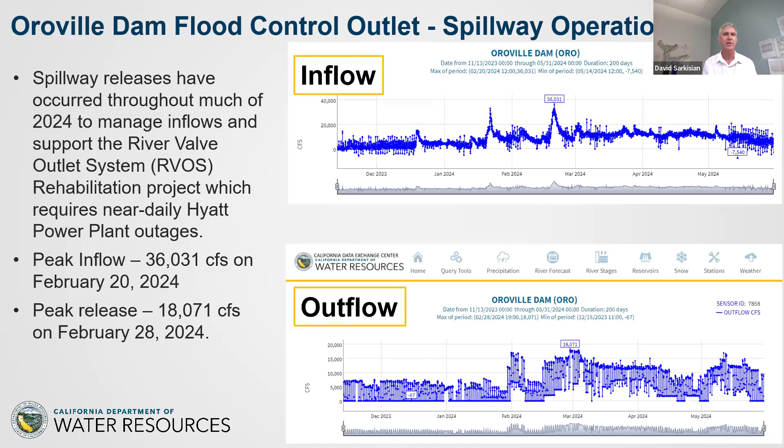Peak inflow was only around 36,000 CFS. That was back in February. So slow and steady is nice, of course. And our peak release was around 18,000 CFS back in February. So in terms of spillway use, quite a bit, but not really large magnitude. Let's go ahead and advance.

This slide speaks to our piezometers that were installed in our flood control outlet, the gated monoliths that house the gates. In that bottom profile is a cross section through those monoliths, and that green line is basically how we drilled through those piers or walls and placed piezometers at the foundation of the structure. We've been watching this data - I think I shared some in the past. What we're looking for is any high piezometric pressures or groundwater on the bottom of the structure. Thus far, we have not seen that, so that is good news, whether it's with the lake topping out or as we're making spillway releases.

The graphic or chart on the bottom right is quite busy, so I'll just try and walk through it quickly. The reservoir elevation is in that light blue, so you can see it ramp down and up through the year, ramping up in the springtime typically. The green bars on the bottom is precipitation, a biweekly value of how many inches of rain. In red is actual spillway releases - we want to see, do things react during a spillway release? And lastly, the little dots are the actual data from the piezometers. The majority of them are pretty quiet, that band in the middle with the amber and some blue and some red underneath. The one piezometer we do see a little bit more reaction from is B162 in gray, in the top of the figure there.

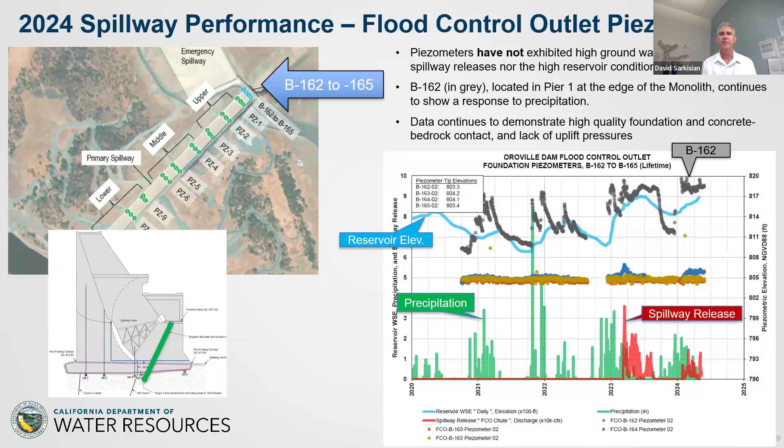That piezometer is on the far edge of one of the monoliths, where we transition from the gated spillways to another monolith, so it's a little bit different configuration. We're seeing that react to both rain, and it also stays a little bit elevated when the lake is up higher, but the pressures are really not of concern. It just tells us there is some communication - rainwater is getting to that piezometer, and when the lake is high, it's also seeing a little bit of seepage there, but nothing to the level of concern.

Here's a graphic depicting the piezometers down at the toe of the dam. You might recall we installed these, I think it was in 2020. We put a series of piezometers in the toe of the dam to monitor pore pressures at that location within what we call our drainage blanket. We've been seeing similar trending behavior with these piezometers. In the graphic, we've got the reservoir elevation, precipitation in green, and you can see how these kind of ramp up and ramp down.

Of course they become elevated when we have a lot of rain, so a lot of that rain is percolating down through the embankment and getting into our drainage blanket. Then as the rain diminishes, but the lake is still rising, topping out in late spring, we're actually seeing these piezometers fall off - the pressures are dropping, groundwater's dropping. That tells us this is largely driven by precipitation. We've seen that trend in 2023, 2024, and even back in 2022, though that was a little bit more subdued. But all this aligns with our thinking over the years at how precipitation really drives the amount of seepage we see, and it correlates with what we see through the seepage collection weir for the dam. So that's all good news, confirming our understanding of what's driving seepage for the dam.

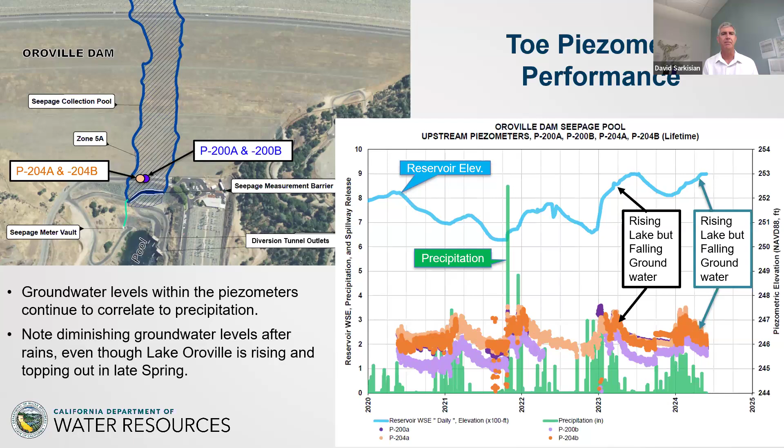Moving on to the flood control outlet projects - you might recall we've been working on analyses for monoliths 25 and 26, the gated monoliths, for a number of years. Since we last talked about this topic, we've updated our model to address some comments from the Division of Safety of Dams. We've also incorporated the pore pressure data from those piezometers to reflect what we're experiencing rather than overly conservative assumptions. What we've seen in our reanalyses is slightly better performance under seismic loading, so a potential for less retrofits. We're packaging up that analysis and anticipating a submittal to both FERC and DSOD, hopefully in the coming weeks.

Another document we'll be updating is our retrofit design criteria document, which lays down the criteria we anticipate using when we get to the point of designing retrofits. Getting concurrence from our regulators early on that criteria is really helpful to move things along. We also reanalyzed the bridge, and that fortunately meets a performance standard for no collapse for a 10,000-year seismic event. This work is ongoing - these models are very robust, and we get a lot of great feedback from our regulators to fine tune things and revisit the modeling and the performance.

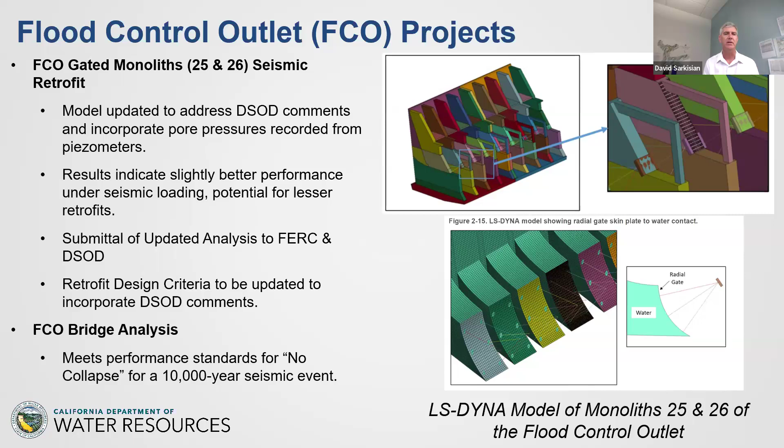This slide is intended to chart the road map of how we see this unfolding. The past couple of years, we were working on nonlinear analyses, sophisticated modeling, and submitted results to DSOD and FERC. In this time frame, we're incorporating that piezometer data into the modeling. We're also planning to take a quantitative risk analysis look at these monoliths so we can focus on the potential failure modes specific to these monoliths and understand the baseline risk at a greater detail than what was done back in 2020 with the level 2 risk analysis. That's really going to help us build the case and understand what investment we need to make and how we're going to efficiently and effectively reduce risk for the structure.

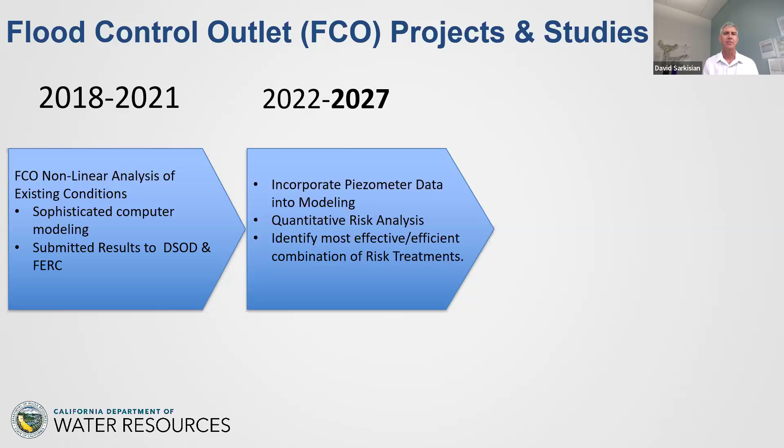We'll also look at the variations of risk treatments in this time frame. Let's advance again. Like we've had in the past, we see these two possible outcomes, now that we've got this work completed and the information in hand to make a really well-informed decision. Path 1: if it's feasible to retrofit and the risk reduction achieved looks appropriate, then we'd initiate a design and permitting effort to get that done.

Or if the retrofits don't look feasible—because the piers have anchors in them for the radial gates, it's a very complex structure, and we have to be mindful of how invasive we are with retrofits—if it just doesn't look feasible or the risk reduction is insufficient, that's when we start looking at some of those big items that came out of the comprehensive needs assessment, like a new FCO headworks structure or other new piece of infrastructure.

I still think we're on that upper path where we'll find some good solutions to retrofit the existing structure, but we just wanted to outline the time frame where we see this heading.

In the meanwhile, we do have other projects, one of which is the radial gate hoist maintenance project that we were working on. There are a number of other efforts on the FCO. In the case of that project, this year we aren't necessarily getting a new hoist replaced out there due to the hydrology and the need to operate the spillway to support the RVOS rehabilitation project. So that activity isn't necessarily happening this year, but it's still a project that's ongoing, and of course a multi-year project considering the structure needs to remain in service.

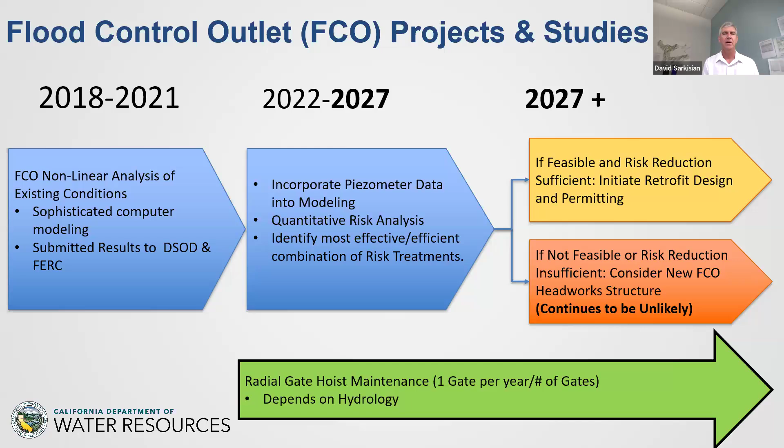Moving on to the emergency spillway erodibility study. We had a number of tasks for this project, one of which was to update the geologic model—that's completed. We also completed the hydraulic modeling of splitting flows between the flood control outlet, meaning the gated spillway, and the emergency spillway, to make sure each facility is really independent of the other in terms of passing flow, since they're right next to each other. That was a question we needed to answer, and we've confirmed that they're independent of one another.

We also verified the emergency spillway capacity, and now we're really moving into the heart of the erodibility study, having these preliminary tasks accomplished. Right now we're analyzing the 2017 incident, using the erodibility or erosion experienced there to establish erodibility parameters for the different types of rock underneath the emergency spillway. That's kind of unique—most owners, fortunately, don't have events where they've got this kind of information. In our case, we do, so we're going to leverage it to really calibrate how we model the rock materials for this study.

We've also got a 3D hydraulic modeling effort ongoing to support the study, and the development of the actual scour model is ongoing. We see this work completing in 2025—I suspect maybe this time next year I'll have some information to share.

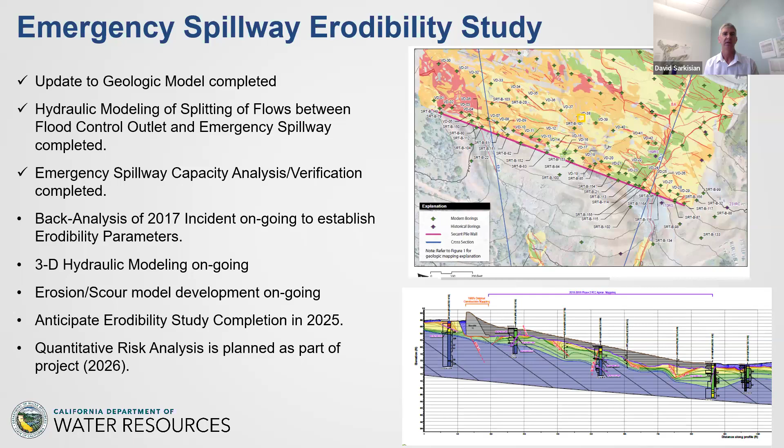As part of this study, we're looking at 5 scenarios, meaning hydraulic flows over the spillway, and we're going to use outflow hydrographs rather than just a constant flow. Most of these types of studies use just a constant flow because it's a lot easier modeling-wise, but that's a little conservative, because these storms don't last forever—they have a rising limb, a peak, and a falling limb. So that's what we're going to do here.

We've got a number of scenarios tied to return periods, so that we can take this information into that risk workshop and understand the frequency of these types of events and the damage to the spillway or hillside that might be experienced under these flows.

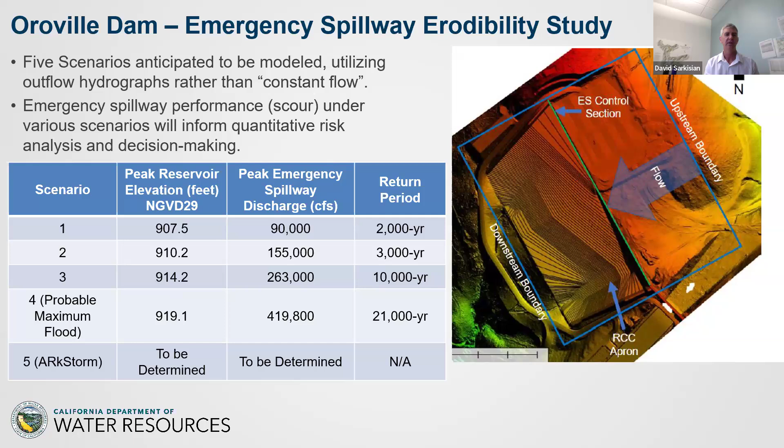We'll take it up to the probable maximum flood. And then we're also going to take a look at the ARkStorm, one of the ARkStorm scenarios. You might recall that's a much longer storm but has a lower peak. But that may lead to a different performance for the emergency spillway. So we want to look into that and make sure we've captured that kind of storm and have an understanding of its performance under that longer but less intense flow.

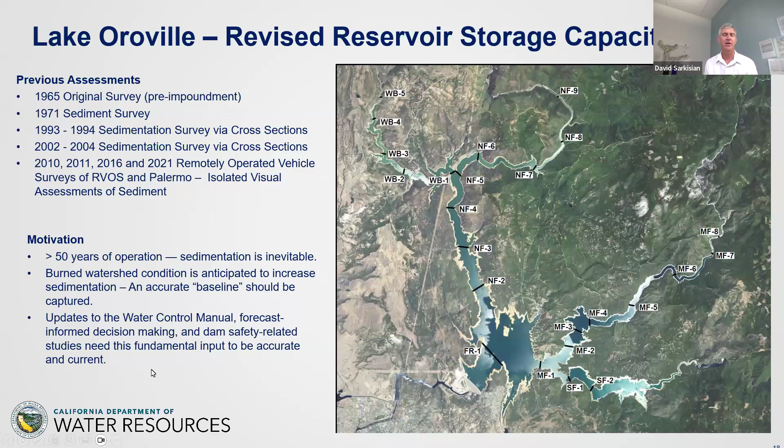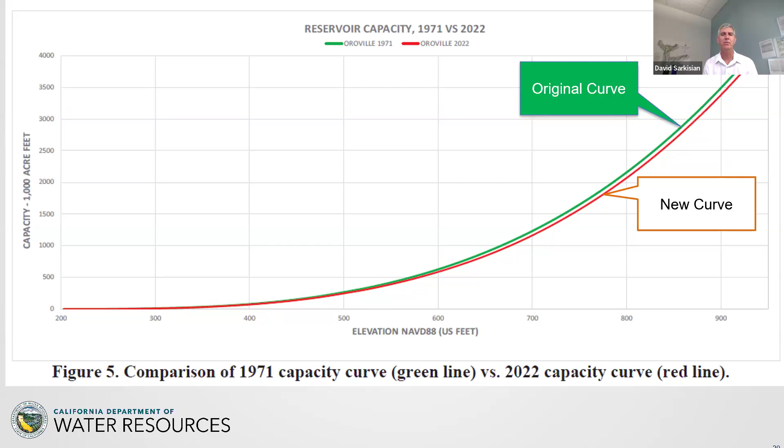Here are the two curves, original in green and the new curve in red. Just visually, not a huge difference. I think that was somewhat expected. We don't see huge amounts of sediment coming into the lake, so we felt this makes sense based on anecdotal observations and where we think we might land. Let's go ahead and advance to the next slide.

Of course, there is some loss of storage. Some of that is sedimentation. And looking at the data, most of that is in the far fingers of the lake, below elevation 650, where it makes sense the rivers are bringing this material in and it's dropping out relatively quickly in most cases.

But we also think some of the difference is just due to the coarseness of that original survey. It was basically 20-foot contours, so pretty coarse in terms of precision and accuracy, done with 1960s methodologies, compared to modern technologies. The LiDAR provides a bare earth surface, and our data is in 1-foot contours. So we think there's, in some cases, just a mismatch in technologies.

So that's basically, we've had this 3.5 million number for years and years, and now our current capacity at elevation 900, so the lake topped out, is at that 3.4 million acre feet value. That's a reduction of roughly 112,000 acre feet, 3.2% over greater than 50 years. I think it kind of fits at least within where I think this would end up. Again, just great information to have as we move into these other studies, that we now have this current understanding of what we've really got behind the dam.

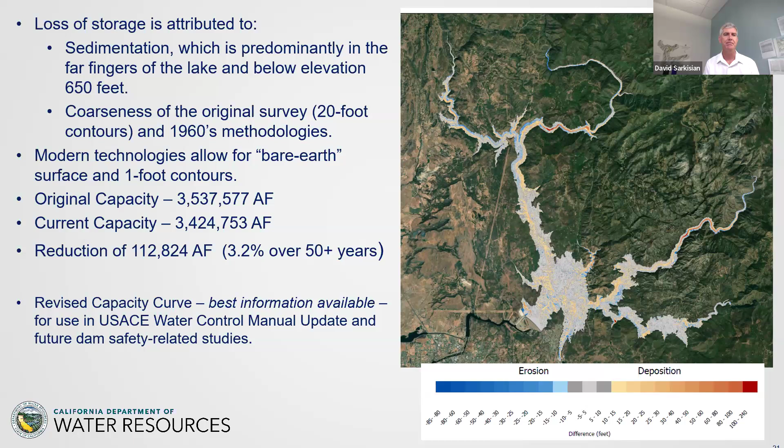As many of you know, we have a 5-year Director's Safety Review Board, or a Part 12D safety inspection. The first is driven by the California Water Code, and we conduct that board with a Division of Safety of Dams. The Part 12D safety inspection is conducted with the Federal Energy Regulatory Commission. In both cases, the consultants we contract with need to be reviewed and approved by FERC and DSOD.

We retain them through a request for qualifications, where we interviewed a number of people to make sure we're getting a diverse and independent perspective as they conduct these reviews. Back in December of '23, we conducted the Director's Safety Review Board inspection with DSOD of Oroville and the Saddle Dams. Then in January, we conducted the Part 12D, what was called the periodic inspection with FERC. FERC updated their guidelines, and the periodic inspection does not have the level 2 risk analysis compared to the comprehensive assessment, Part 12D.

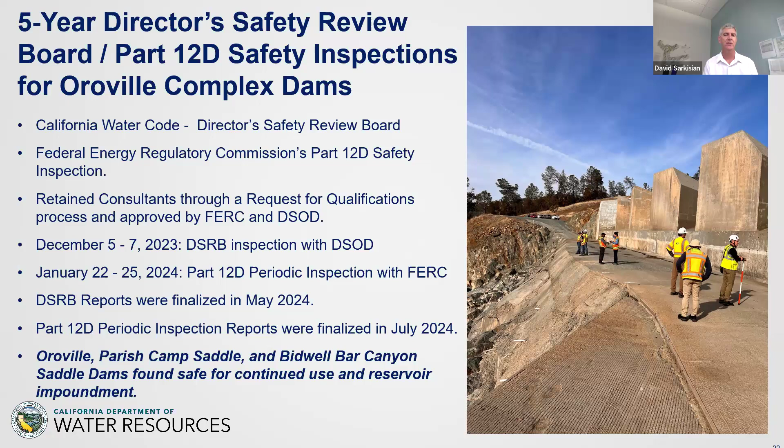We received our Director's Safety Review Board reports in May and the Part 12 reports in July. In both sets of reports, one of the main conclusions we're looking for is that Oroville, Parish Camp, and Bidwell Bar Canyon Saddle Dams were found safe for continued use and reservoir impoundment. Next slide.

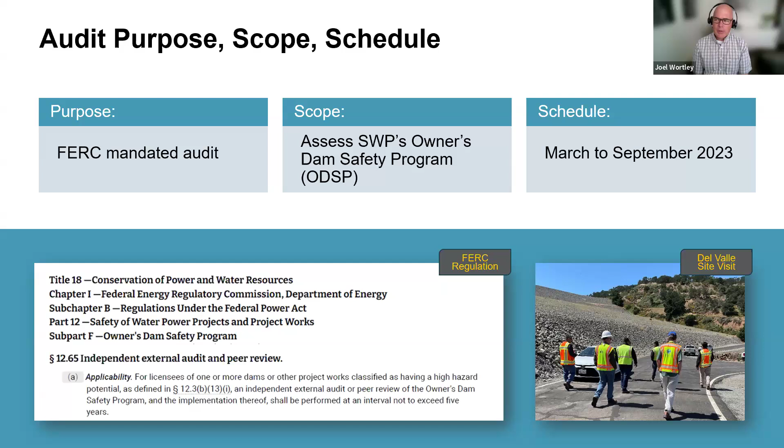Communication works well within the program between the Chief Dam Safety Engineer, its steering committee, and the executive. The Dam Safety Engineer himself is a strong champion and strong leader for the program.

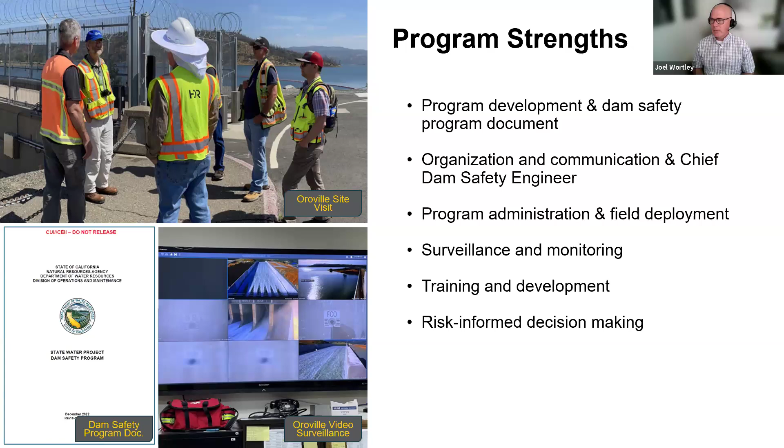The opportunity we found is that there's a lot of development happening at the State Water Project right now, and the policy needs to be kept up. So there's an opportunity there, when needed, to make sure that policy gets updated.

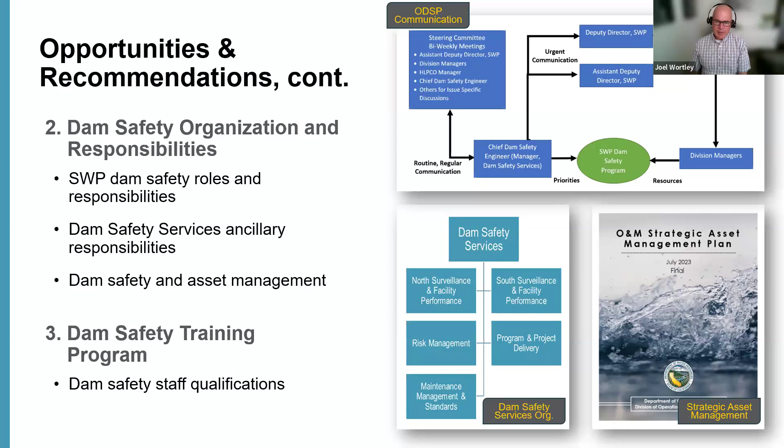When it comes to communications, coordination, and reporting with respect to program metrics, we found that the reporting was on point with what was being accomplished, but there was an opportunity to put it in context of requirements. So not just reporting how many of whatever got accomplished in a given year, but how many needed to be accomplished, to demonstrate minimums were being met or exceeded. Doing so would facilitate a scorecard view of the program's performance, which enhances reporting.

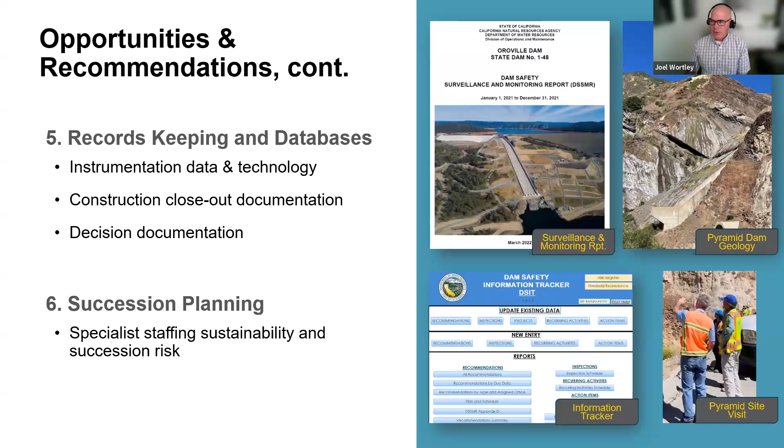With respect to continuous improvement, we say that the program does very well in challenging itself and driving improvement. We did identify a few other opportunities.

With respect to a portfolio view of dam safety risk, good progress is being made around risk-informed decision-making and evaluating potential failure modes. The opportunity here would be to roll those up into a portfolio view, which aggregates those individual risks, gives more context to them, and promotes or facilitates risk communication internally and externally.

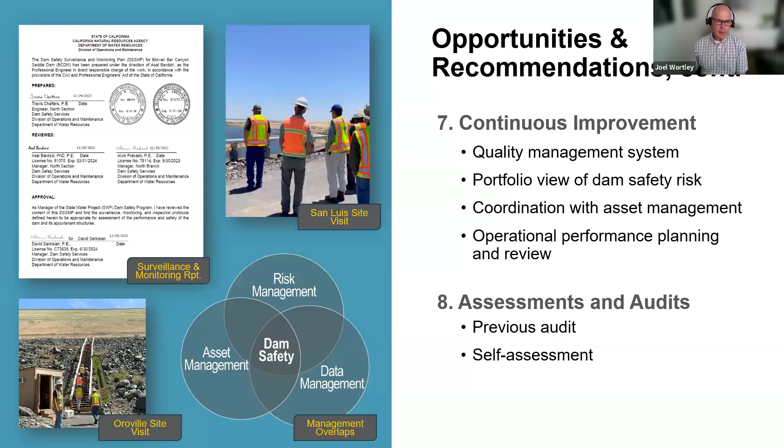So, audit conclusions. The program has come a long way and is doing well. There are ongoing challenges, and the first we'll highlight here is just organizational change.

Aging infrastructure is driving a lot of change and a push towards asset management within the organization. As commented, that overlaps with risk management and data management and several of the underlying processes that build up to become the dam safety program and effective dam safety. It's going to be an ongoing challenge for the program to make sure they are not only keeping up with those changes, but leveraging them to the betterment of the program. They need to be at the table and have a strong voice in ensuring that dam safety is kept informed and kept involved.

Staffing and succession, as we've already talked about, these are key to the dam safety program, and definitely some of the bigger challenges we've identified in the audit. Technology helps, but at the end of the day, dam safety is reliant on people and judgment. And with turnover and loss of staff, that loss of institutional knowledge can make it hard to maintain that critical mass of experience and judgment.

And I'm sure we all know hiring these days is very challenging. So those skills and experience are hard to come by. They're in short supply. You can't just hire people who will line up and look for an opportunity with you. And even the ones you do hire, it takes time for them to get to know the facilities and to build the experience and familiarity to have good judgment when it comes to complex issues.

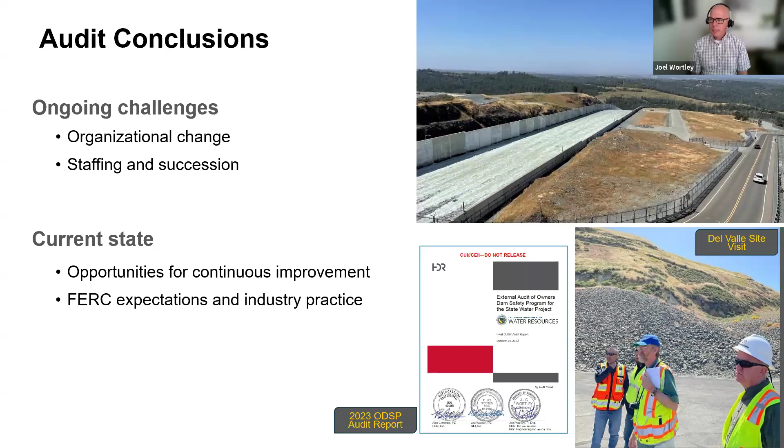We did find that the program meets FERC expectations, with the one exception - non-conformance regarding the annual dam safety communication to staff - and that it does compare favorably to industry practice and other dam safety programs we've been exposed to. And with that, I'll thank you and ask if there are any questions.

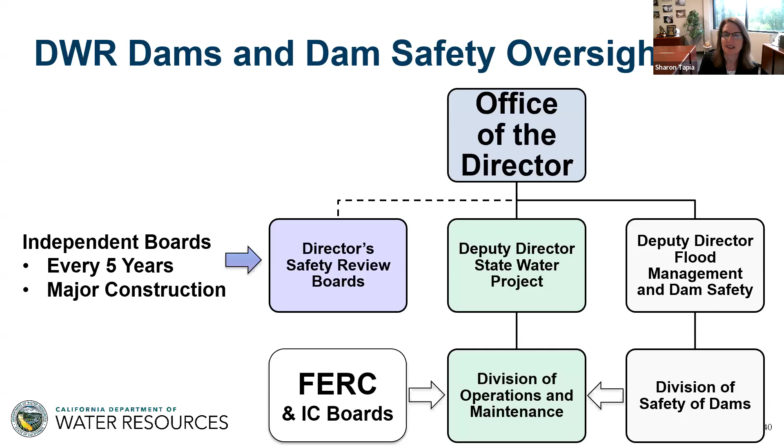In the earlier presentation, the independent boards were already discussed, so I'll skip that on this slide. I did want to note, though, hydropower dams owned by the department are dually regulated, as you're probably aware, in that they are regulated by both DSOD and the Federal Energy Regulatory Commission, known as FERC.

In response to a catastrophic failure of the St. Francis Dam that occurred on March 12, 1928, the California Dam Safety Program was created in August of 1929 to regulate dams with respect to dam safety. So this month, our program turns 95 years old.

This is a view of what our program looks like. We have one of the largest dam safety programs in the nation with a current staff of 93 full-time employees. Our budget last year was almost $28 million, and this budget primarily funds our positions.

We do not fund projects for dam owners, nor do we make decisions on the need for the construction of new dams or dams to be removed. Owners are given the option to either repair their dams to meet current standards, alter their dams to lessen jurisdictional size, or to remove their dams from jurisdiction.

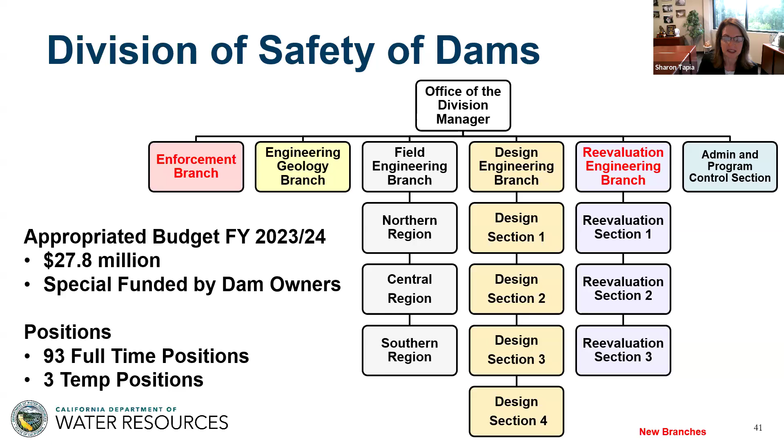Our program is led by a team of expert engineers and engineering geologists. We have 2 new branches noted in red that have been added in recent years, an enforcement branch and a reevaluation engineering branch, and I'll go into that a little later in the presentation.

We are currently regulating 1,234 dams, and we have a varying inventory of dams with 200 dams that are over 100 feet high. And obviously Oroville is the tallest at 770 feet high, which stores up to, we know, 3.4 million acre-feet of water.

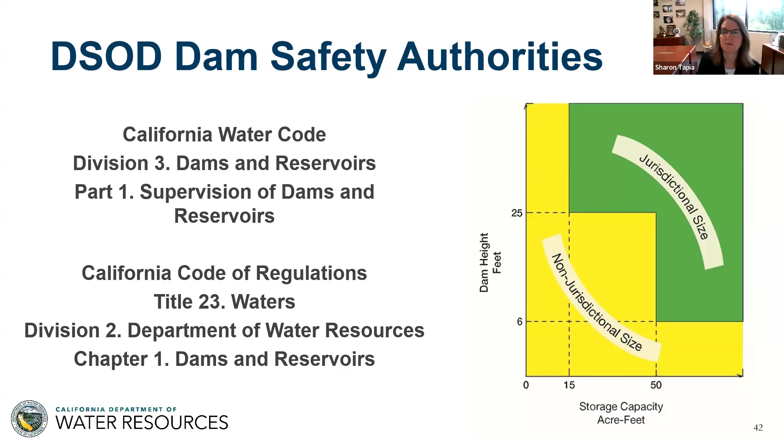Like many dams across the nation, the age of our dams in California is now about 70 years old. We do have aging infrastructure. Many of these dams were built before the modern era of dam design and earthquake engineering.

These dams are owned by a variety of owners, ranging from private citizens to the state of California, like the department. We regulate 19 dams owned by the department. Dams are classified by their downstream hazard potential, which is based solely on downstream impacts to life and property should a dam fail with a full reservoir. This hazard classification is not related to the actual condition of the dam.

So these charts are color-coded by the hazard classification of dams, and we use FEMA's hazard categories. There are 3: low, significant, and high. But in 2017, we changed the Water Code for us to also include a 4th category of extremely high hazard dams.

And that's really to be able to separate dams like the Oroville Dam, the ones that if they had a sudden release of water would impact 1,000 people or more, and you could potentially have extensive life loss.

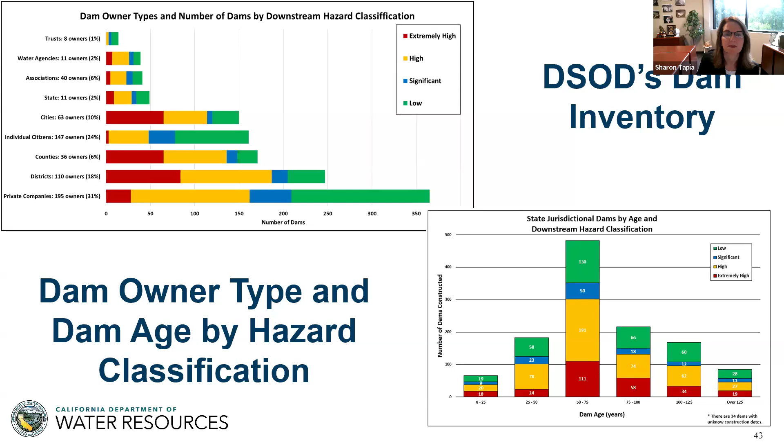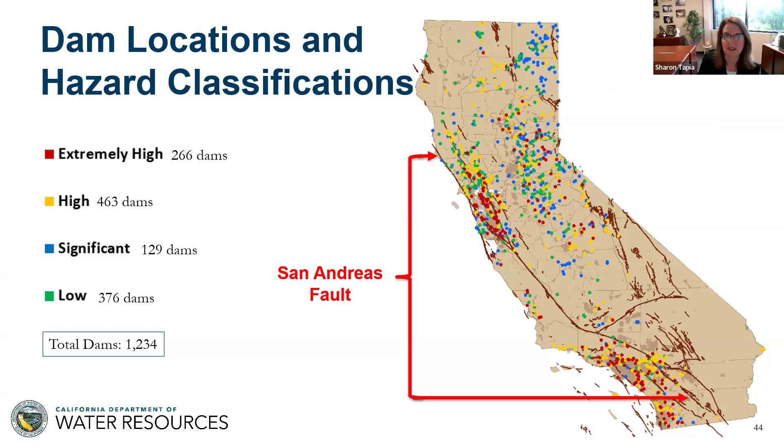Next slide, please. DSOD conducts independent reviews on proposed new dams and any enlargement, alteration, repair, or removal of an existing dam. So anytime we receive anything, such as anytime the State Water Project is doing any work on Oroville Dam, they submit their reports to us. They also have to submit an application if they're going to do any modifications, and we do a complete independent review of the work that's being proposed.

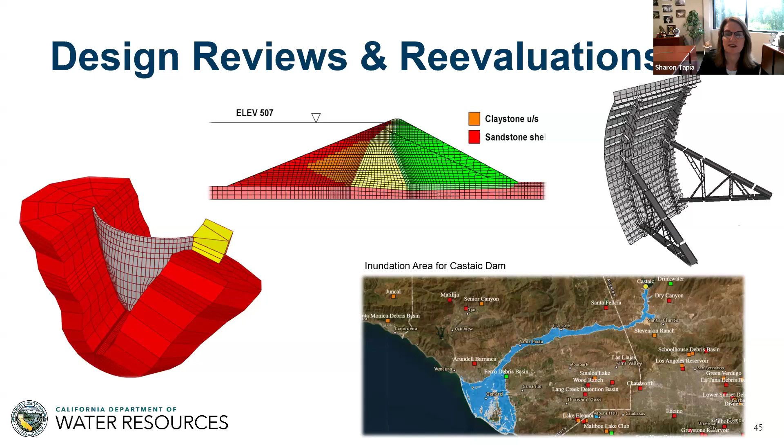We also conduct reevaluation studies of existing dams, which may involve a focus review, such as a seismic stability analysis or an updated hydrology analysis.

DSOD engineers and our engineering geologists play a key role in the oversight of construction projects. Inspections are conducted to ensure the projects are being built in accordance with plans and specifications approved by DSOD.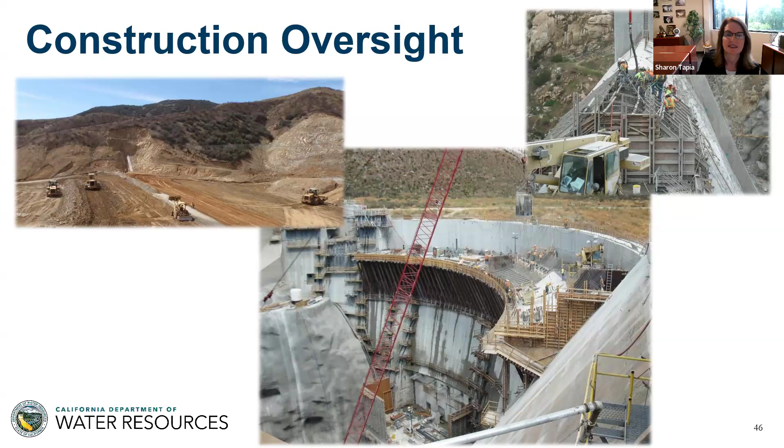DSOD also has regulatory authority to supervise the maintenance and operation of dams, insofar as necessary to safeguard life and property from dam failure or an uncontrolled release of the reservoir. We inspect all of our dams annually, except the low hazard dams, which are mandated to be inspected at least once every 2 fiscal years.

In addition, dam owners must also fully operate their critical control features on their outlet systems and spillways every year, and in our DSOD presence every 3 years.

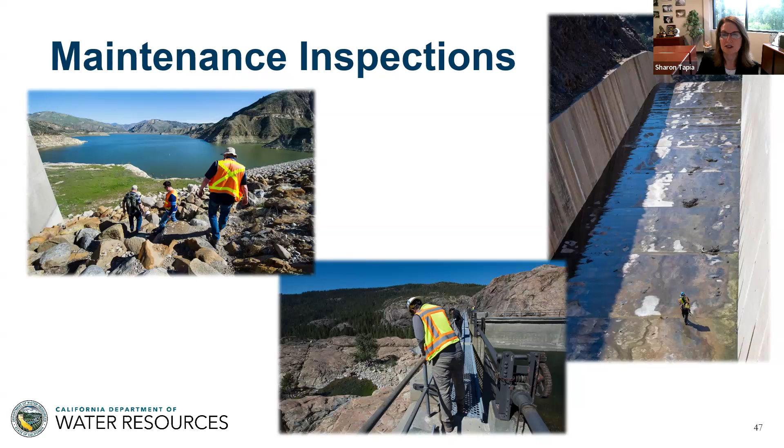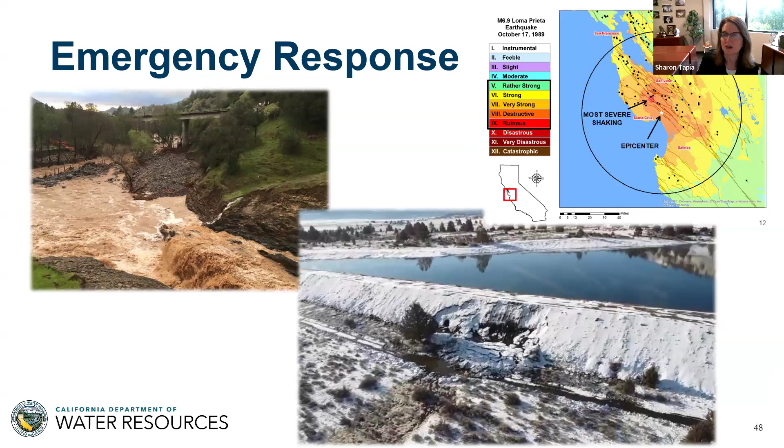Next slide, please. DSOD is also prepared to respond to dam safety incidents and emergencies. For a large-scale emergency, such as if California would have a major earthquake, DSOD would immediately stand up an emergency operations center and deploy multiple teams to dam sites.

So we have expanded our program to bolster dam safety. We have now incorporated risk-informed decision-making, and that was recommended by a technical advisory panel. And we have also implemented a civil administrative enforcement program that was authorized back in 2017 through Senate Bill 92.

Our risk program will be focused on the more than 700 dams classified as high and extremely high hazard in our inventory. We are developing the program as appropriate for us being a large regulatory agency, and we plan to move from the pilot program that we've been doing over the last couple years into the formal program next year.

We will be using risk-informed decision-making to inform and prioritize our reevaluation efforts of the dams of highest hazard that have potential deficiencies that have a higher likelihood of leading to failures that can impact downstream life and property.

Additionally, we have our enforcement program underway. Non-compliant dam owners are now being issued notice of violations, and they may be issued administrative complaints if they take no action when they receive their notice of violation. Owners will also have an option for an administrative hearing process to be sure they have due process.

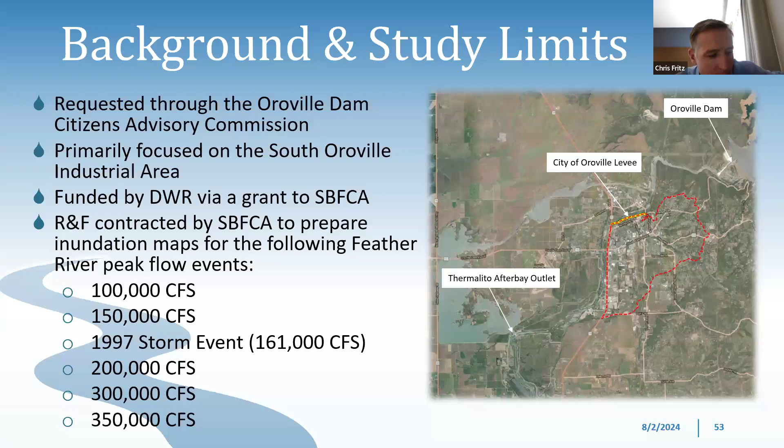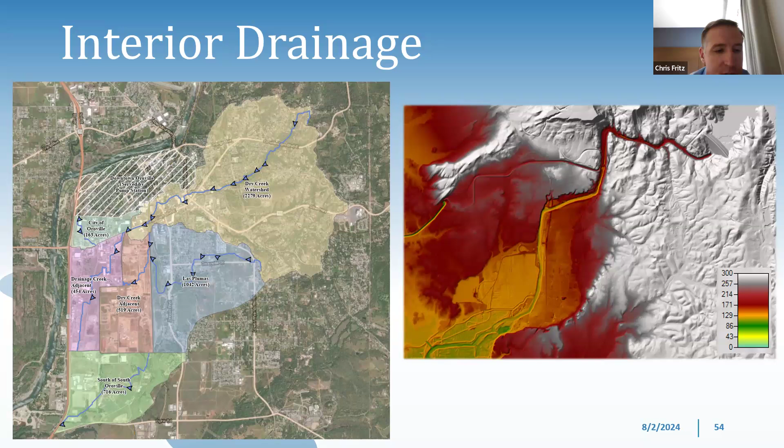This is important because as river levels rise during instances of high flow releases, water will impound against the highway and it'll actually back up into the interior drainage system. So if you have that instance where high flows combine with a local rainfall event, the local rainfall essentially has nowhere to go once you reach that point.

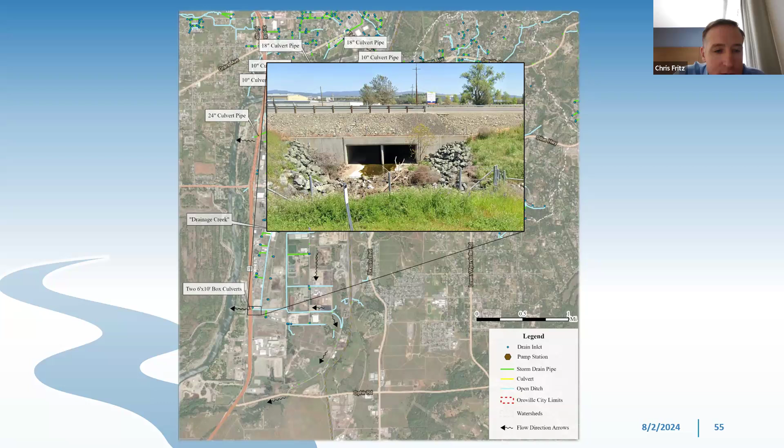Another key finding, in addition to the mapping we did for looking at high flow releases and localized rainfall, we identified another potential risk due to seepage flowing under that Highway 70 embankment and through.

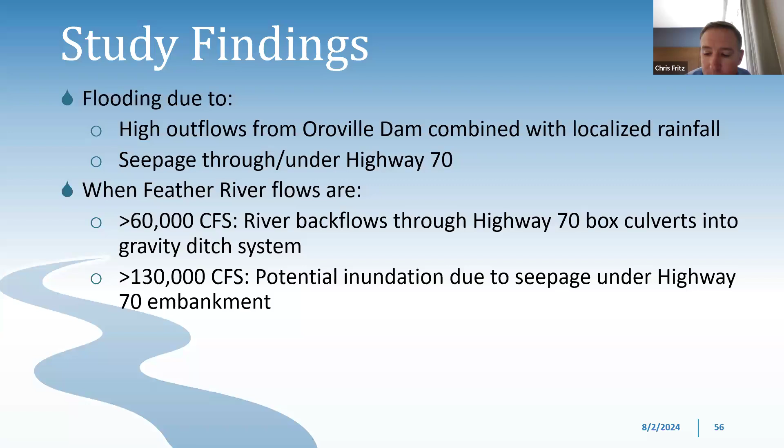As water is impounded against Highway 70, and this was something observed back in 1997 during that historic event, there is that potential for areas adjacent to that embankment to experience inundation impact.

As rivers continue to rise, or as flows continue to increase, that water backs up further and further into the system and eventually begins to impact local properties. In 2017, there were actually observed instances of salmon making their way up into the urban areas of the city.

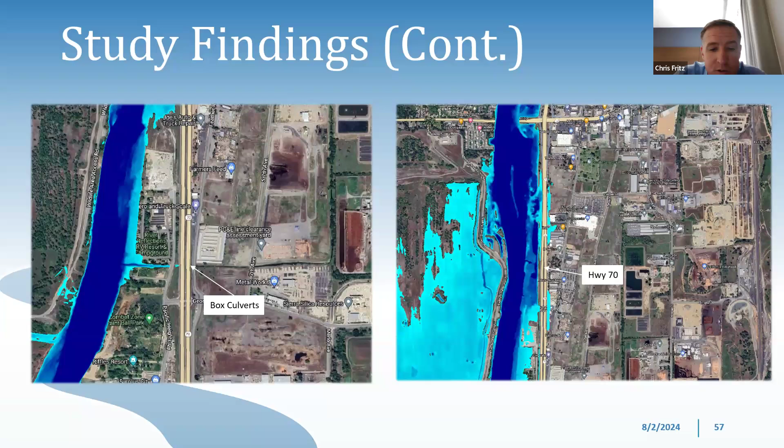I know I've gone fast and this is my last slide, but this basically shows the final results of the mapping exercise we conducted. The figure on the left shows the 1997 historic event, and we did quite a bit of effort as part of this modeling update to understand and better understand the 97 event.

As we developed these maps, we did it in coordination with local stakeholders, and I want to thank everybody who spent time sharing their experiences and knowledge of what happened in 97. We had some back and forth and quite a bit of updates that we incorporated into the model as part of that outreach effort, and it gave us confidence in the results. It was an invaluable exercise to truth check the model results for these other simulations that were run.

The figure on the right shows the example of an outflow of 200,000 coming out of the dam, a little bit greater than a 200-year event, combined with a 100-year localized rainfall event. You can see the significant extents of inundation there, and some areas being inundated greater than 5 feet.